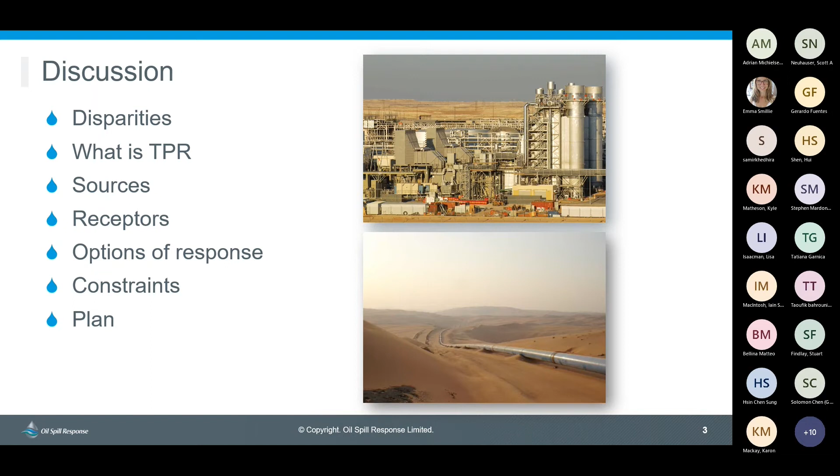So when looking at oil spill response in terms of tiered preparedness and response, there are many international conventions specific to the marine environment, which prescribe to the ratifying country what is needed in terms of preparedness through its articles and/or regulations. Guidance is then often written off the back of the convention to assist governments, operators, agencies and OSROs to fulfil the obligation of the specific convention for the specific country, which enables an easier transition to national law. However, when we look at inland oil spill response in terms of tiered preparedness and response, there are no such international conventions prescribing the same detail as for that of marine.

So why is this? Well, beyond a country's exclusive economic zone, seas and oceans are referred to as international resources. These are resources which belong to the countries of the world, although oceans are technically viewed as international zones, meaning that not one country has jurisdiction over it. There are international regulations in place.

A major oil spill to the marine environment often has a higher degree of global interest to that of an inland oil spill. This is because marine spills can and will almost probably affect many different countries and cross many international boundaries. Of course, this is dependent on the location of the spill and the environmentals at that time. So basically, oil spills to the marine environment can have a greater international impact as well as a domestic impact.

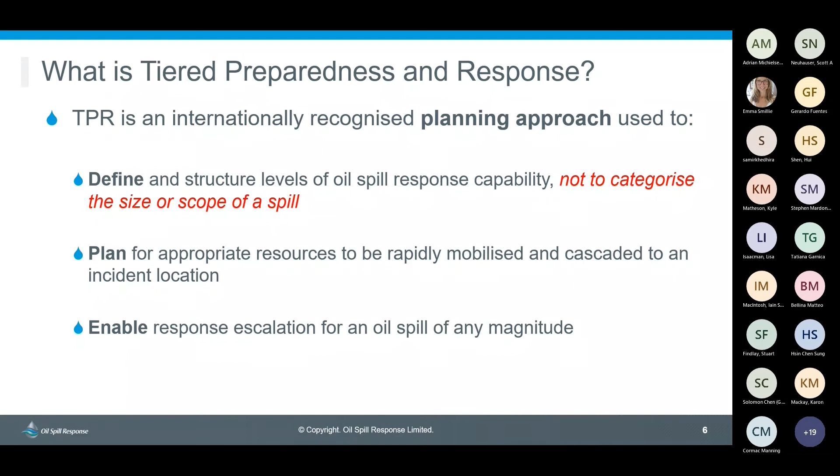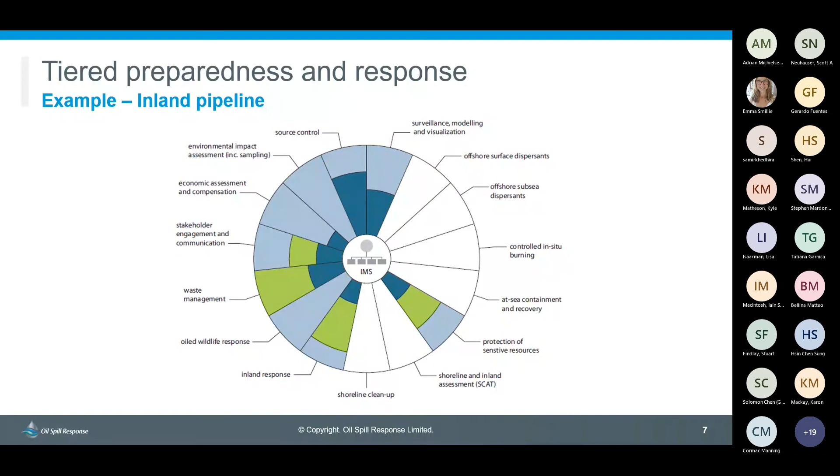Each of the 15 segments display their tier level of response. On the right-hand side, you can see that dark blue represents tier 1, green for tier 2, and grey for tier 3. Again, the illustration is a qualitative representation of the tier level capability.

As a reminder, tier 1 constitutes resources necessary to handle a local spill and or provide an initial response. Tier 2 represents national or regional resources necessary to supplement the tier 1 response. And tier 3 are the global resources necessary for incidents requiring substantial additional scale, complexity, and impact.

So what are some typical sources of an inland spill? Okay, so oil spills in everyday life are all around us, whether a vehicle accident, an industrial spill, or in someone's garden from a domestic oil tank. Bad housekeeping of operator sites and equipment can lead to degradation of apparatus, storage tanks can leak, and processing plants can fatigue, again through bad housekeeping.

Tanker rollovers are very common, as well as the derailment of trains. Pipelines also, due to their often isolated locations, are open to theft and sabotage, and then there are potential blowouts and pump station incidents as well.

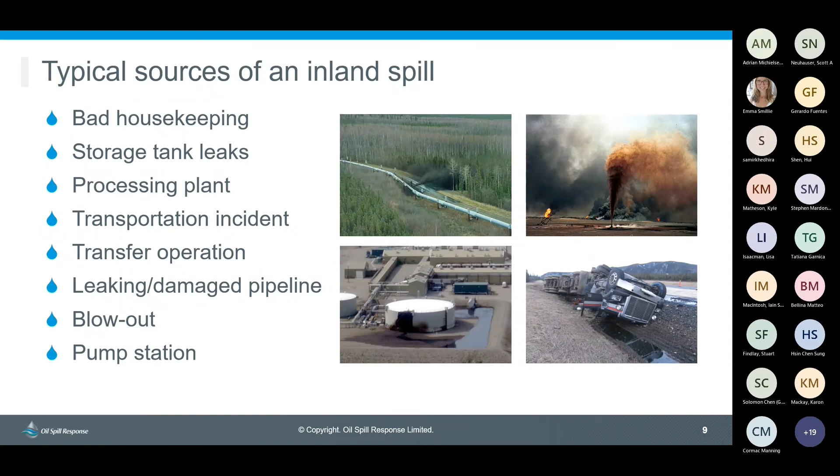So who and what could be affected by these spills? So typical receptors are rivers and their tributaries, aquifers if the lost product goes to ground, canals, reservoirs, agricultural land, transportation routes and the links associated with it, property, be it domestic or commercial property, businesses and commerce, amenities such as play parks for children, schools, shopping centres.

Then there is also the more far-reaching of deserts, mountains and forests. Pretty much anything and everything we see, visit and utilise in our daily lives could potentially be affected by an inland spill.

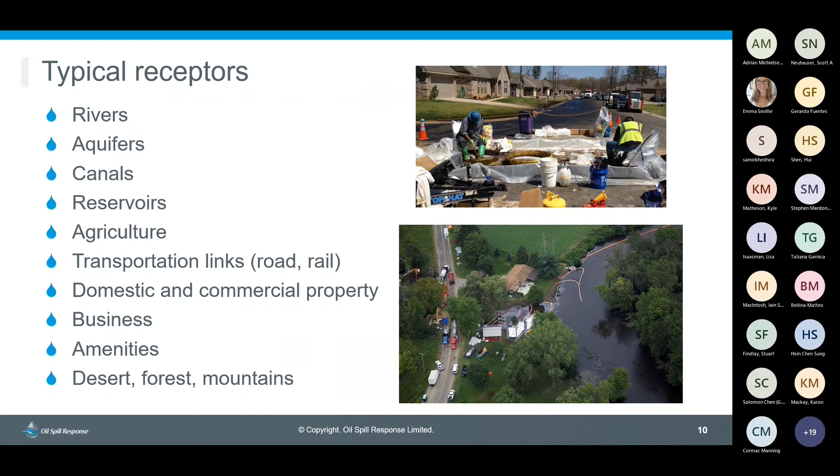So what are some options for response? When assessing options for a response, it is important to employ the most appropriate option for the incident type, its location, the local infrastructure and the local environment.

To avoid spread of contamination and escalation of pollution, it is important to contain the lost product as quickly as practically possible. Containment can be achieved by using simple equipment, not that much different to what can be used in the marine environment. And such equipment can be booms, skimmers, earth-moving machinery, drain mats, absorbents, sand, clay, stone, and so on. Lots of different aggregates.

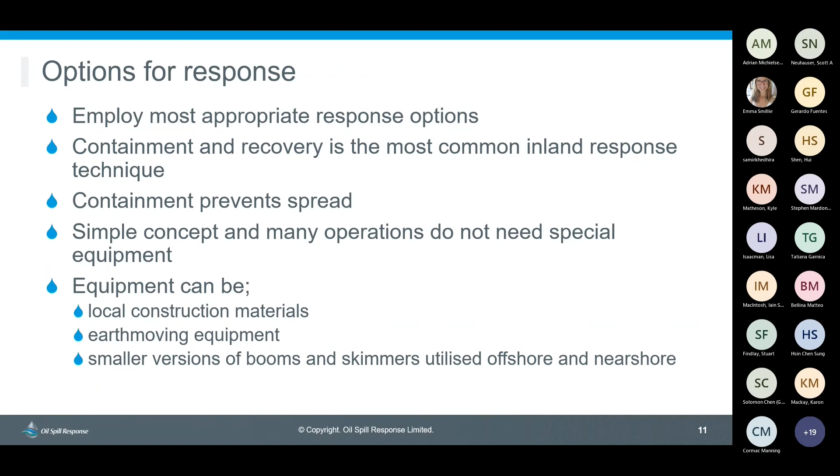Booming is a great method to corral, limit spread, contain and deflect hydrocarbons where they may enter static or flowing water courses. The hydrocarbon will travel with the flow of the water, but there will still be interference from wind.

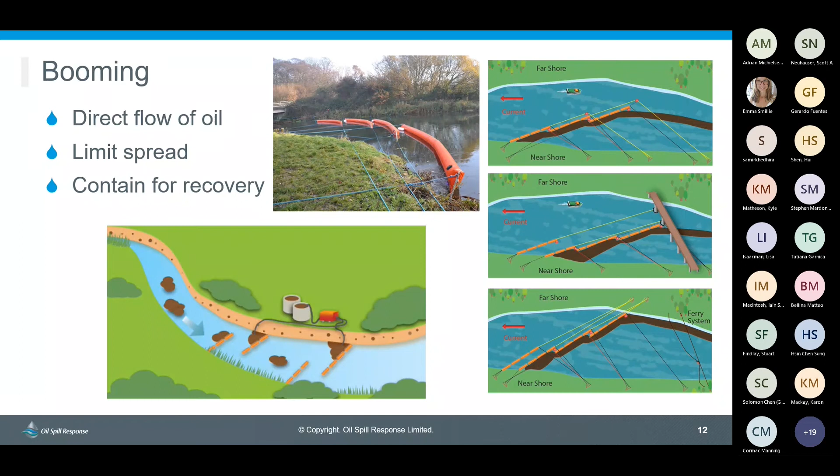As well as booming, we can do some damming. Damming will allow for more control of less wide watercourses. It allows for water height to increase behind the dam, becoming more static whilst the flow of water is exiting beneath. The static higher level of water allows for collection and recovery.

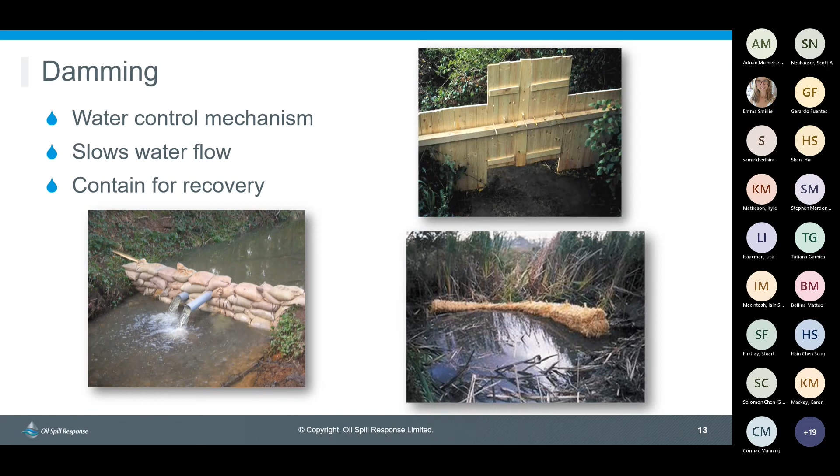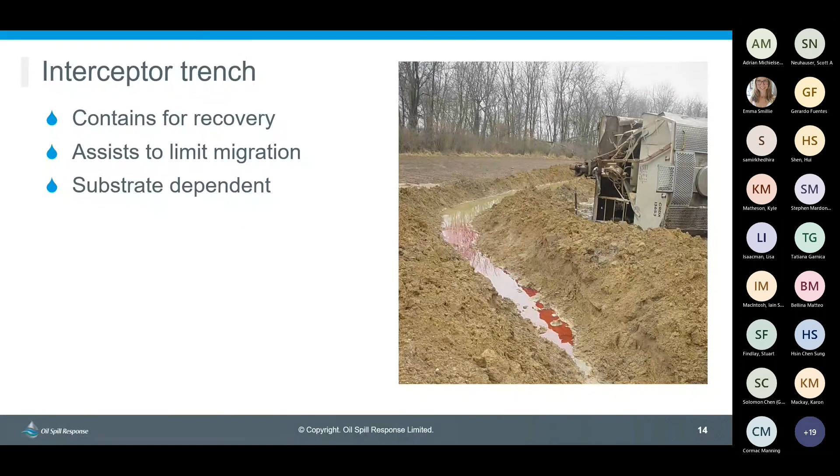So there are various methods to clean up an inland oil spill. There's natural recovery. This is a very slow process, but maybe the only course of action from a safety and operational perspective. Also from an environmental sensitivity stance, as more harm could come to the area if efforts to clean it up were undertaken. There's manual recovery, again dependent on the sensitivity of the area and also looking at access and egress constraints for equipment. Manual recovery could be the only option.

This method can be a very labour-intensive strategy and could utilise a large number of people and associated tools, so strong site management would be needed here to avoid further contamination to the surrounding area. We have mechanical recovery in the form of skimmers and pumps for watercourse recovery and civils equipment for land recovery. The use of civils equipment used for land recovery needs to be managed again to ensure no more waste is being unduly produced.

We can use the water. If the location and conditions allow for it, controlled flooding can cause the lost oil to float to land for containment and then recovery by skimmers. And again, flushing can also remobilise oil from substrate and wash it from the surface to strategically placed containment boom for recovery later on. Absorbents are a great method to remove amounts of stranded oil. Just be mindful here of producing extra waste.

And finally, we do have in situ burning, not a massively used technique, but this is a method that could be considered when physically recovering oil is not really a feasible strategy and is best utilised in very remote areas with high groundwater levels. Some environments can recover more readily from burning than if left without any form of treatment or recovery, but remember specific local permissions will be needed here.

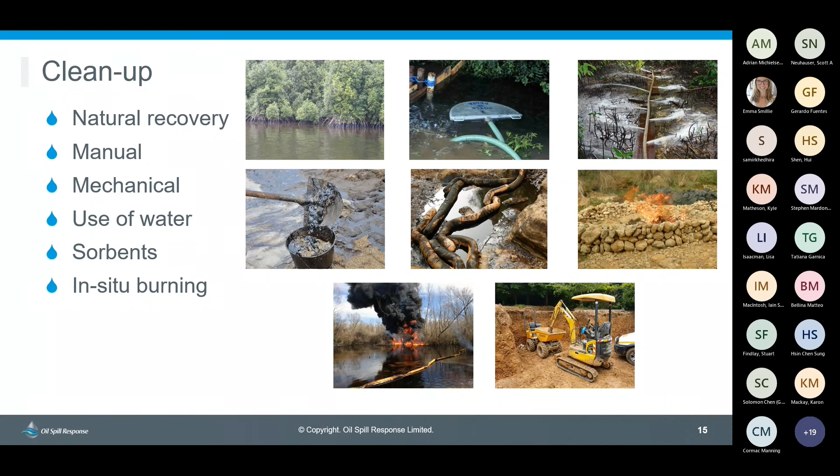So when you've used some methods to contain, recover, and you've used some methods to clean up, there's going to be storage. So with the cleanup activity, there is always waste management and the storage of it. Inland spill sites can be quite remote, so temporary options for storage are always needed. The best two options are that of portable storage tanks, which can be located at strategic sites with response equipment, so your tactical control points. And these are best utilised for small quantity of storage and spill cleanup.

And then if we go larger scale, we can manually dig storage pits with heavy machinery. These can be lined and used to store a huge amount of waste, but bear in mind the larger the pit, the harder they are to cover. And if you're in an area that has propensity for rain, protecting those larger pits from the elements to reduce flooding and overfill can be quite a challenge. And then you'd also need the logistics to empty those storage pits and storage facilities to transport away.

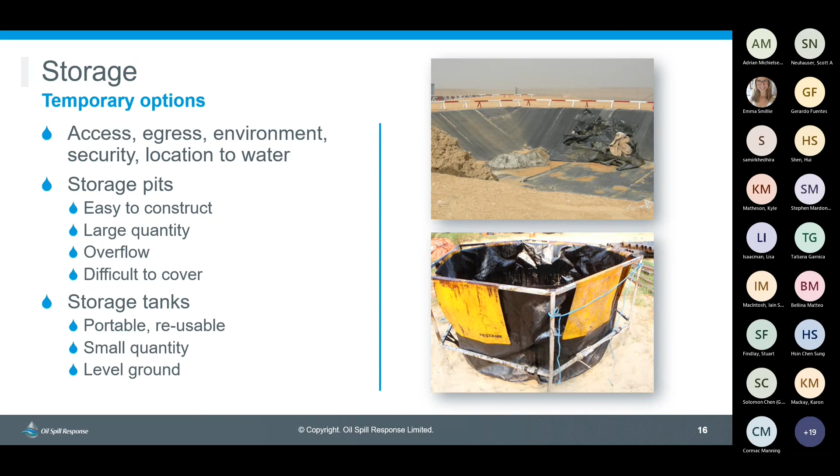So looking at constraints and challenges within land, you need to ask yourself certain questions about the product and the scenarios that you will face as a risk for your operations. So will the viscosity of the product that you may lose influence your strategy? Is the product free moving when it's lost? Will it be slow flowing or will it stay static? Will the product evaporate and produce gas clouds? Will it change with different atmospheric temperatures? So basically, how will this lost product behave?

We also need to take into account an influence on the strategy from the local terrain. How will this influence? Are there underground or overground utilities where you get your source pathway receptor? So it would cause that pathway to affect a receptor from the source. Are there conduits? Are there pipe runs underground, overground? Is it a freeway, a roadway, or a brown or greenfield site? Or is the spill near water?

What is the geology of the site? Is it on sand, which will allow the product to permeate through it? Or are you on a thick clay mixture substrate, which will allow the product to free phase and migrate laterally? So is the site easily accessible in terms of logistics, and can people and equipment get in and out easily?

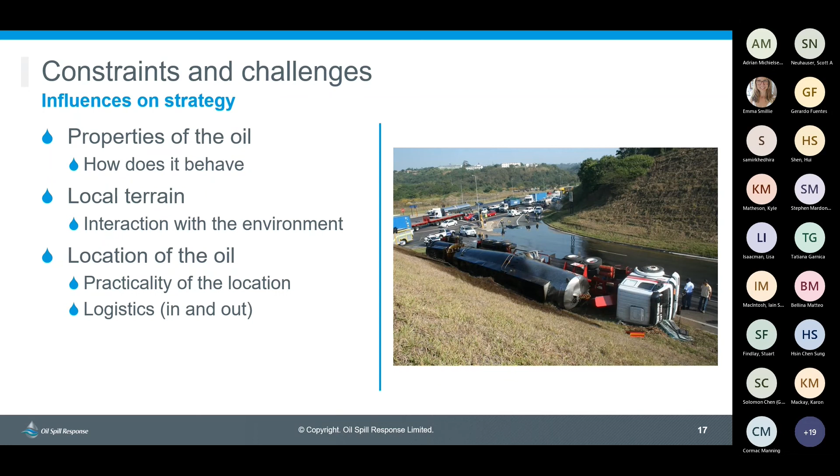Talking further with the terrain, are there steep slopes which will aid with the lateral migration of a lost product? Because the fluid will always want to flow downhill. Is the ground impermeable? A surface where oil may come across no boundary, it will flow with lateral migration. If so, try to contain it, block drains, block inlets.

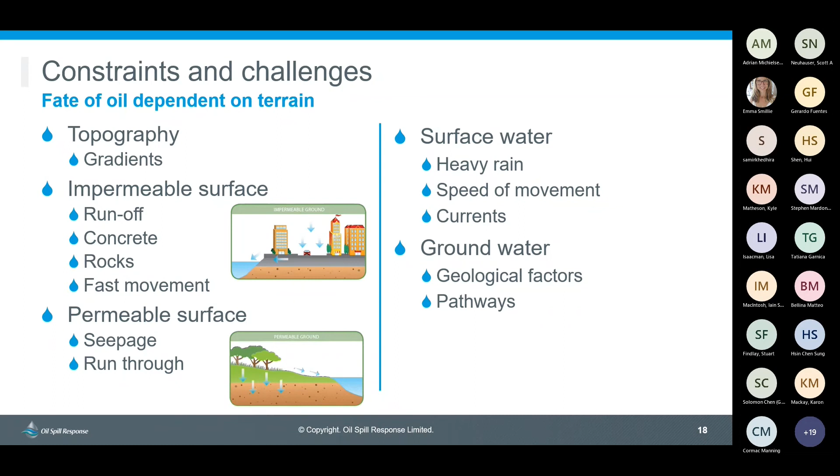So when responding to inland spills, the main factors to consider are stakeholders, logistics, and the geography of the spill site. Equipment selection and the tactics employed may change very little in relation to the volume of oil to be recovered. Overcoming waste management issues in remote locations is a considerable challenge. Often in remote locations, the quality of the road infrastructure can be so inadequate that transporting oiled waste long distances can be very difficult or impossible to achieve. A robust Tier 1 capability can assist responders in the initial stages of a response and ensure time and resources are used to the greatest effect.

Seasonal variation has an enormous effect on response techniques. The feasibility of the response technique used in an inland response strategy will change throughout the year. Watercourses that may be dry or flowing at very low levels in the dry season can turn into wide, fast-flowing channels at other times of the year.

Information on the pathways for pollution into watercourses is essential. Refineries and storage tank facilities benefit from understanding the drainage routes for mobile oil away from the source. Oil will travel overland or through drainage systems away from the source. Tactical response plans should provide information on pathways for pollution so that if containment is breached, secondary response sites are identified.

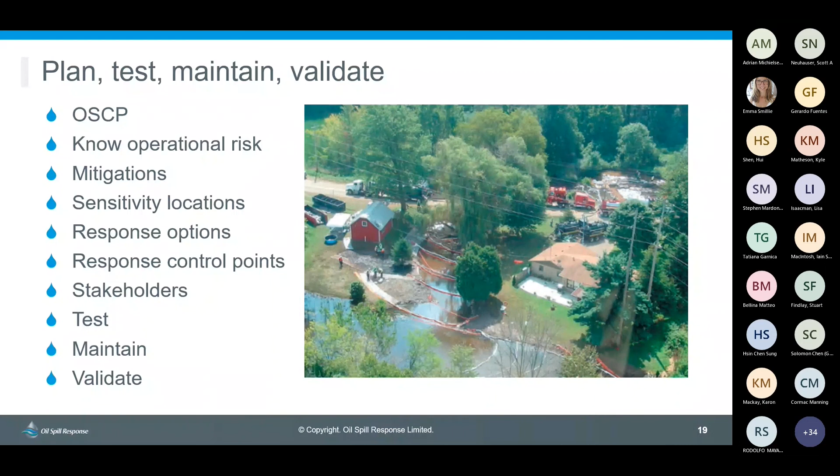So thanks for listening. That's brought me to the conclusion of my, how long have we been?